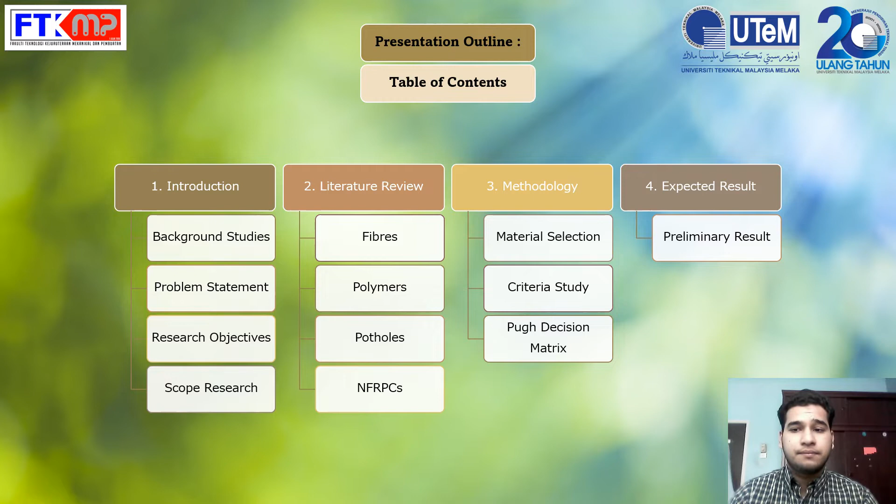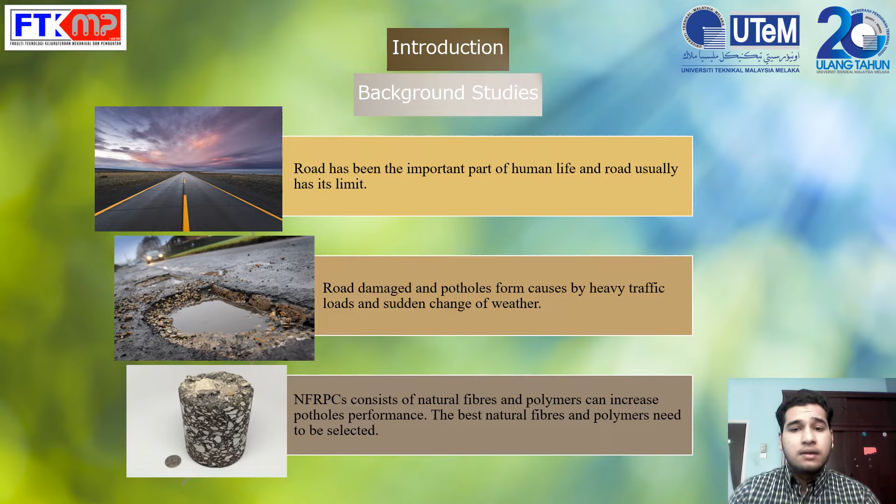Let me give some brief background first before proceeding to my main objective. Roads have been an important part of our life, and over time, they will reach their limit and start to damage. This is due to increasing heavy traffic load and change of weather. Pothole repairs do not last long because of their bad quality. Thus, some studies said that natural fiber reinforced polymer composite can improve their performance. But there are a lot of natural fibers and polymers that can be used in asphalt mixture.

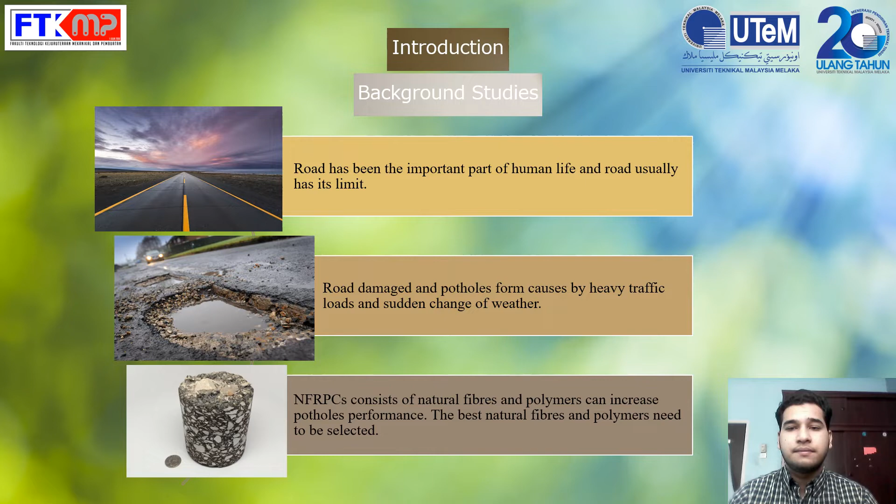So, the problem that we are facing is to get the best natural fibers and polymers to be used in asphalt mixture. Then, the suggestion that we made is to study the material criteria, and in my scope, thermal and chemical properties are being studied. And the solution is we will rank the material selection by using the Pugh decision matrix.

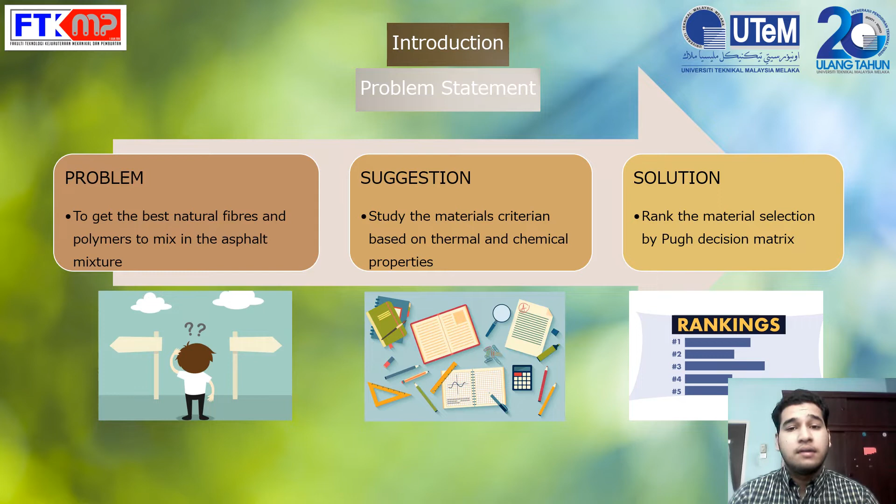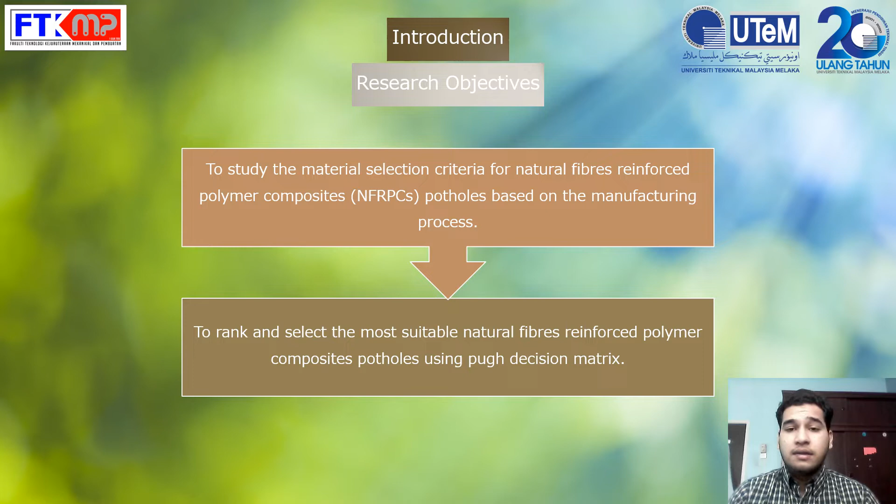So, my main objectives are to study the material selection criteria for natural fiber reinforced polymer composite potholes based on the manufacturing process. And my second objective is to rank and select the most suitable natural fiber and polymer by using the Pugh decision matrix. My scope is to study the material criteria and proceed to give the ranking score based on their thermal properties and chemical properties. And lastly, to choose the best natural fibers and polymers based on their ranking score.

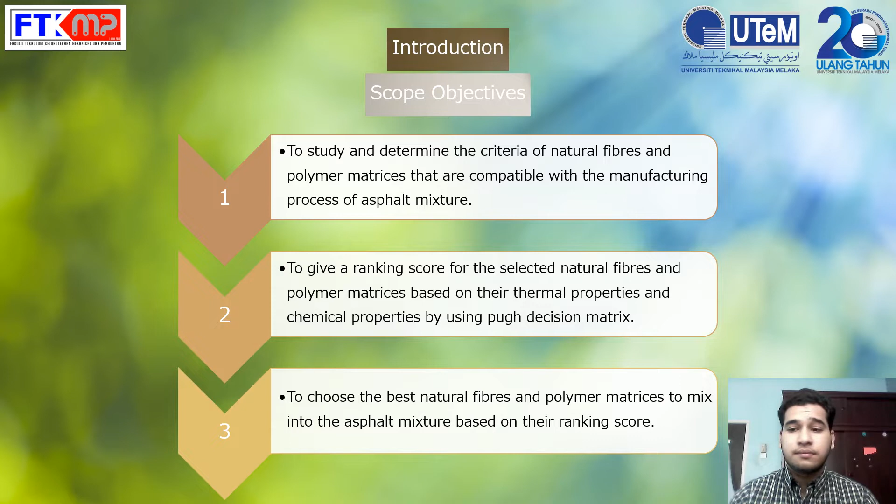From my literature review, a polymer is a large molecule that consists of repeating subunits known as monomers, and natural fiber is a thin thread that is extracted from animals and plants. Combining natural fiber with polymers will form natural fiber reinforced polymer composite. There are a lot of advantages of natural fiber reinforced polymer composite, such as durable, high strength, lightweight, good insulator, and dimensionally stable.

Muhammad et al. 2015 state that natural fiber reinforced polymer composite has been applied in a lot of sectors like construction and building, road pavement, automotive, and sports.

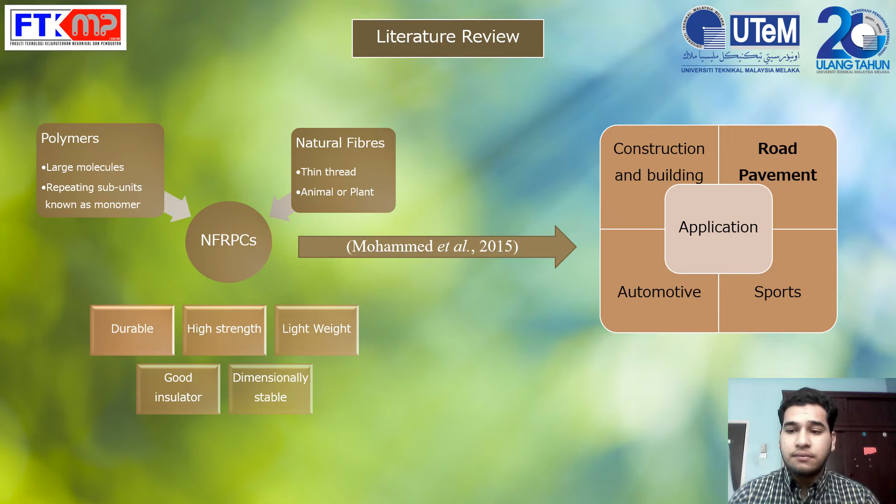So the next part of the literature review is potholes. A pothole is bowl-shaped damage that forms on road pavement, as quoted by Sharma and Kanoungo 2015, and the causes are heavy traffic loads and weather change. Pothole repair is very temporary because of the quality of the asphalt mixture. And Fu et al. 2017 said that the quality of the asphalt mixture can be increased by using natural fiber reinforced polymer composite. So the material criteria are studied based on manufacturing process requirements, and the ranking score for the best natural fibers and polymers is given based on the Pugh decision matrix.

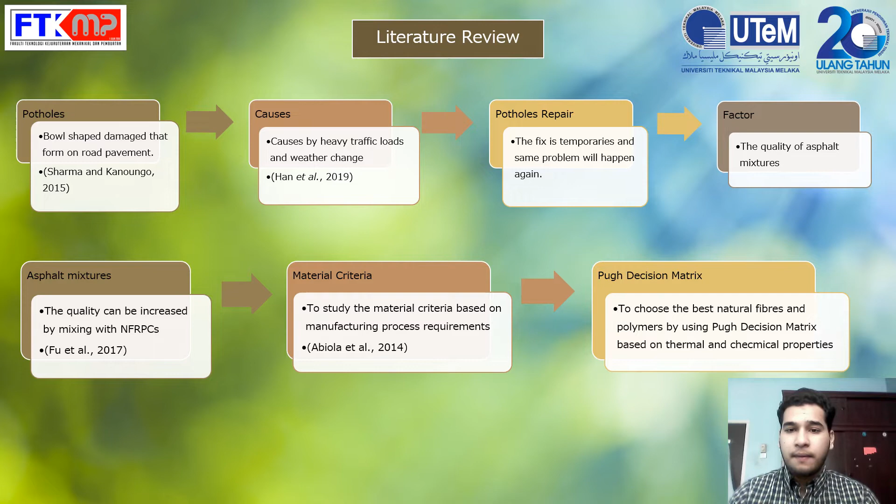In the next slide, I attach my flowchart, and the steps are the process of collecting the data for the shortlisted materials, then ranking to give the ranking score based on thermal and chemical properties, and finally a decision will be made to select the best material.

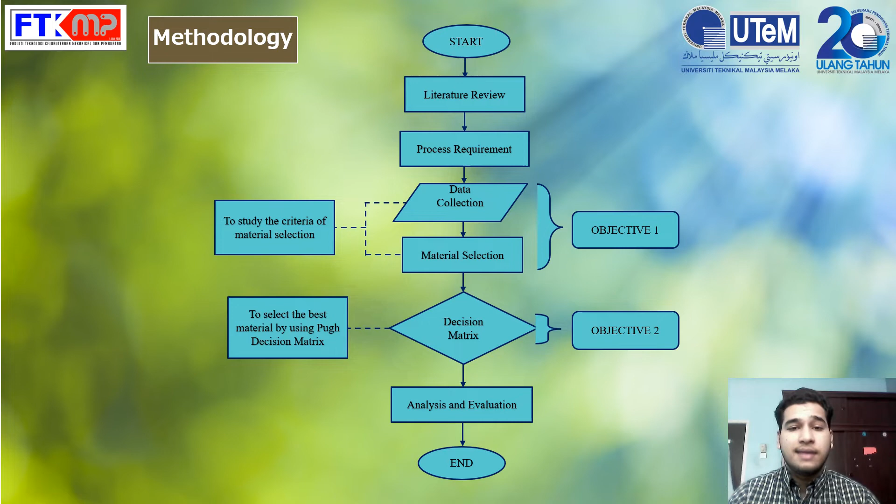So 4 types of polymer and 4 types of natural fiber have been shortlisted, which are polypropylene, polystyrene, low density polyethylene, high density polyethylene, and for natural fiber, coconut fiber, hemp fiber, jute fiber, and sisal fiber will be studied.

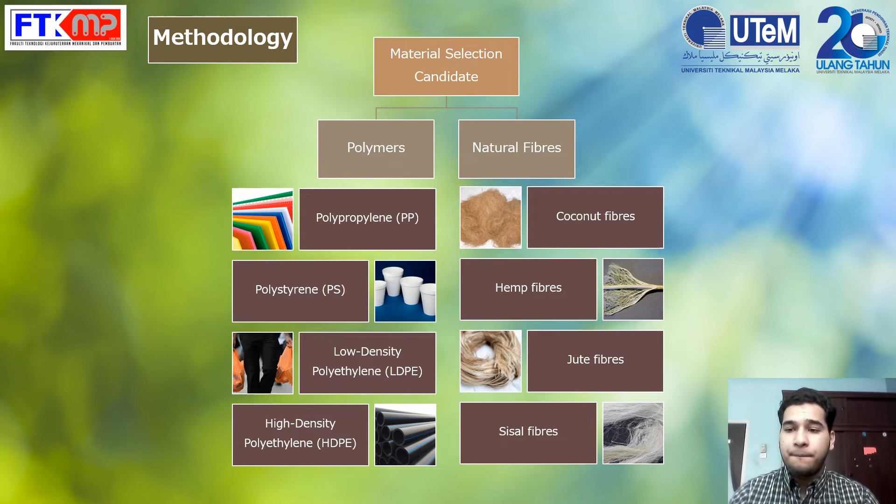The manufacturing process temperature for asphalt mixture ranges from 120 degrees Celsius to 170 degrees Celsius, which will cause heat and oxidation. So, thermal properties and chemical properties for natural fiber and polymer need to be considered.

When comparing the polymers, PP, polypropylene, melting point is 160 to 176 degrees, and HDPE, high density polyethylene, melting point ranges from 120 to 140, and they are in the range of the manufacturing process temperature of asphalt mixture. This indicates that PP and HDPE will be fully melted during the process of asphalt mixture.

For PS, which is polystyrene, the melting point ranges from 240 degrees Celsius to 270 degrees Celsius. And PS is not suitable to be used in the asphalt mixture process because it will not reach its melting point.

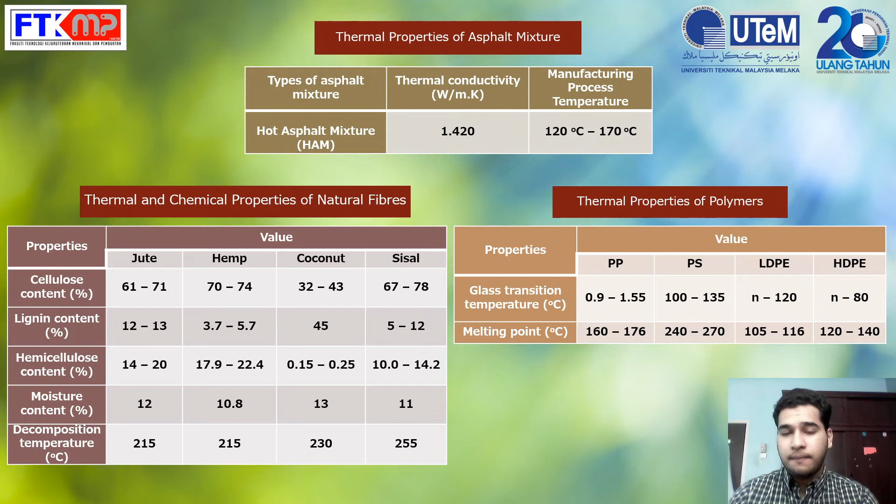So the ranking scores for the polymers are given based on their thermal properties. Manufacturing process compatibility means which polymer is the most suitable to mix in the asphalt mixture based on the manufacturing process temperature. The solid state means which polymer is able to stay in solid state after the process of pothole patching is done, and then the score is given. So here we are able to indicate that HDPE has the highest total score.

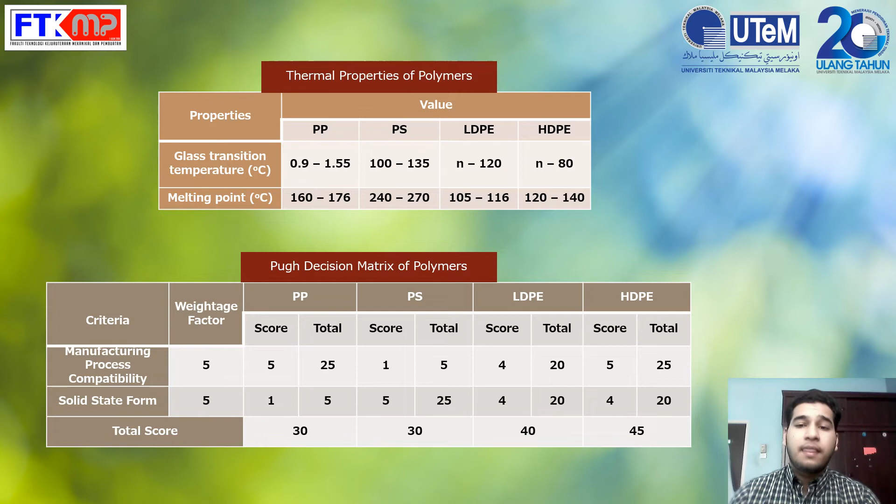For the natural fiber, we are going to discuss thermal and chemical properties. Coconut fiber has the highest lignin content, which is 45%, when compared with jute, hemp, and sisal, which are 12 to 13%, 3.7% to 5.7%, and 5 to 12% respectively. The highest lignin content shows that coconut fiber is the strongest fiber among the other fibers.

And then for the cellulose content, fibers that have high cellulose content are very hydrophilic, which means that they will absorb more moisture, and it can negatively affect the properties of natural fibers. Sisal fibers have the highest range of cellulose content, ranging from 67% to 78%, compared to hemp and jute, which are 70% to 74% and 61% to 71% respectively. And coconut fibers have the lowest cellulose content, ranging from 32% to 43%, which indicates that they have the lowest moisture absorption, so it is the most waterproof fiber.

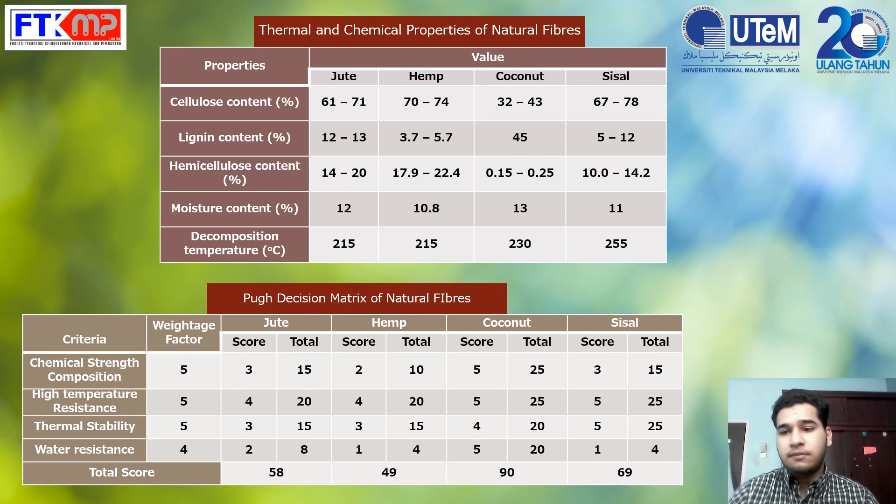Lastly, the ranking score based on the Pugh decision matrix for both polymers and natural fiber can be concluded. It indicates here that HDPE and coconut fibers have the highest rank score, which means that they are the most suitable candidates to be used in the manufacturing process of asphalt mixture.